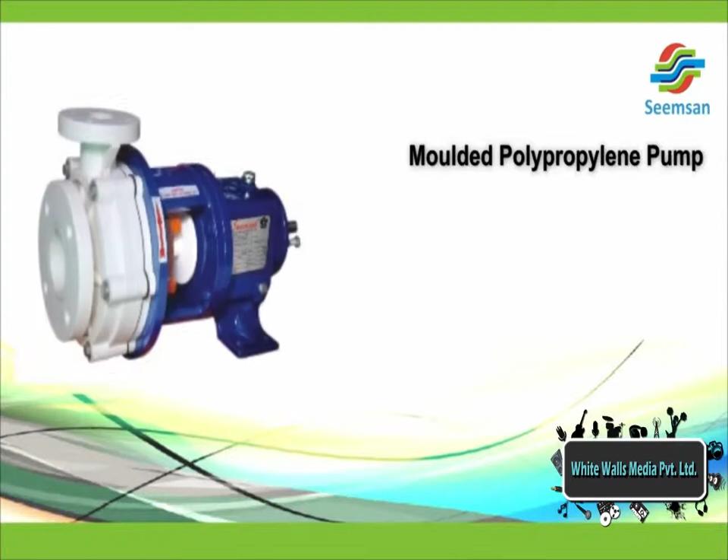Seemsan today offers a product range of three basic categories of pumps: molded polypropylene pumps with a capacity of 0 to 400 cubic meter per hour, a total head of 0 to 63 meters, power of 1 to 60 horsepower and temperature up to 60 degrees Celsius.

Injection molded PVDF pumps with a capacity of 0 to 125 cubic meter per hour, total head of 0 to 50 meters, power of 2 to 30 horsepower and a temperature up to 120 degrees Celsius.

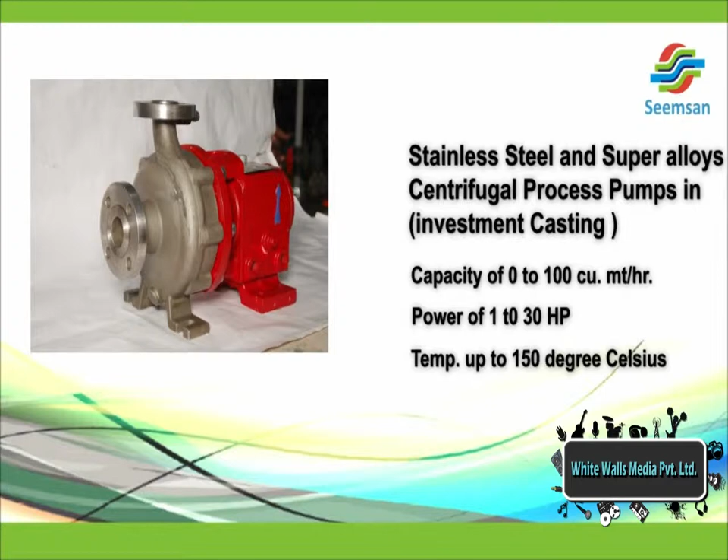Stainless steel and super alloy centrifugal process pumps in investment casting with a capacity of 0 to 100 cubic meter per hour, total head of 0 to 100 meters, power of 1 to 30 horsepower and temperature up to 150 degrees Celsius. Molded polypropylene pumps.

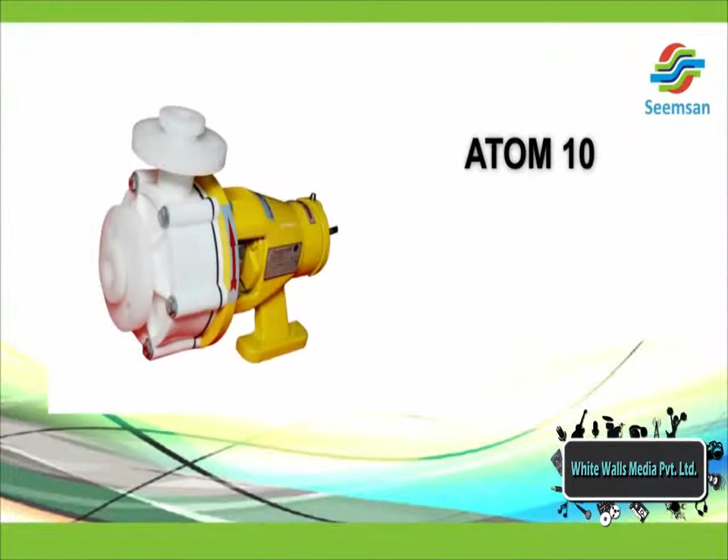This product line includes Atom series, which are low capacity and intermittent duty pumps and consists of 4 models. Atom 10 with a capacity of 0 to 9 cubic meter per hour, head of 3 to 12 meters and power of 1 horsepower. Atom 120 with a capacity of 0 to 15 cubic meter per hour, head of 4 to 14 meters and power of 2 horsepower. Atom 130 with a capacity of 0 to 18 cubic meter per hour, head of 12

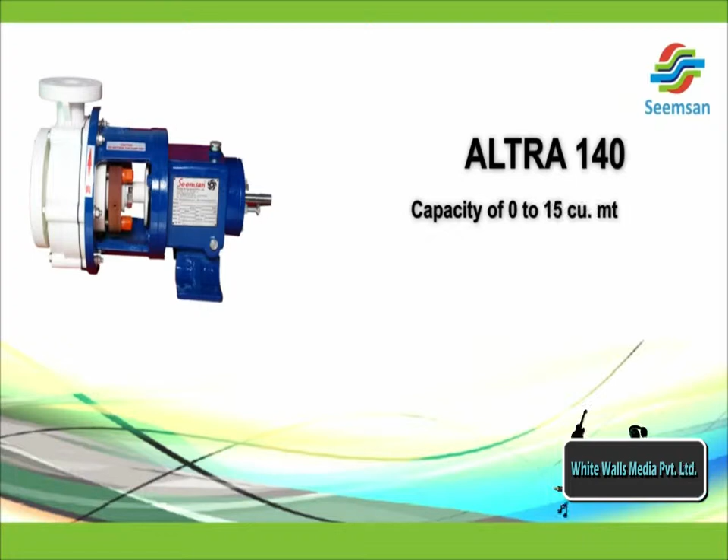to 25 meters and power of 3 horsepower. Atom 135 with a capacity of 0 to 20 cubic meter per hour, head of 12 to 27 meters and power of 3 horsepower. Altra series offers high speed and low speed series. The Altra High Series pumps have 5 models. Altra 140 with a capacity of 0 to 15 cubic meter per hour, head of 6 to 14 meters and power of 2 horsepower. Altra 150 with a capacity of 0 to 25 cubic meter per hour, head of 10

to 22 meters and power of 3 horsepower. Altra 160 with a capacity of 0 to 38 cubic meters per hour, head of 12 to 31 meters and power of 5 horsepower. Altra 170 with a capacity of 0 to 50 cubic meter per hour, head of 14 to 35 meters and power of 7.5 horsepower. Altra 180 with a capacity of 0 to 48 cubic meter per hour, head of 24 to 51 meters and power of 12.5 horsepower. The Altra Low Series pumps have 3 models.

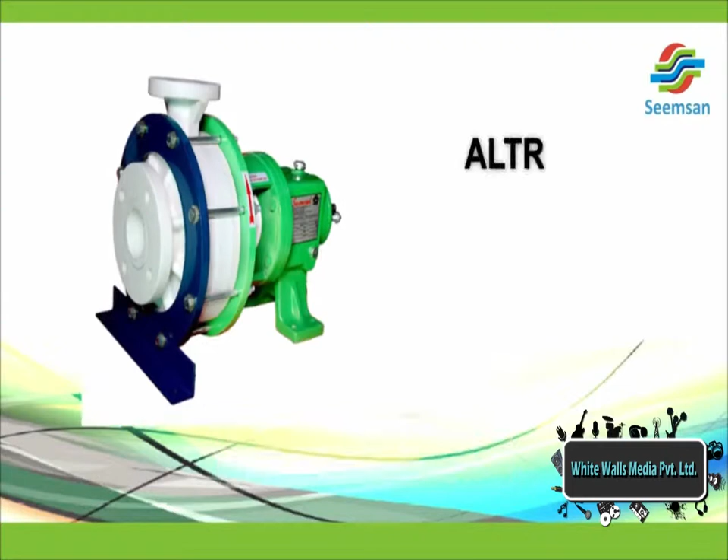ALTR 190 with a capacity of 0 to 24 cubic meters per hour, head of 7 to 12 meters and power of 2 horsepower. ALTR 200 with a capacity of 0 to 30 cubic meter per hour, head of 9 to 15 meters and power of 3 horsepower. ALTR 210 with a capacity of 0 to 44 cubic meter per hour, head of 8 to 16 meters and power of 5 horsepower.

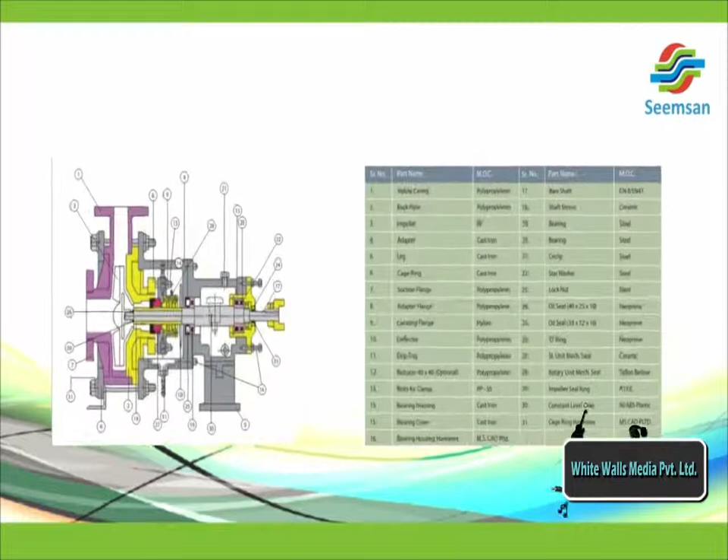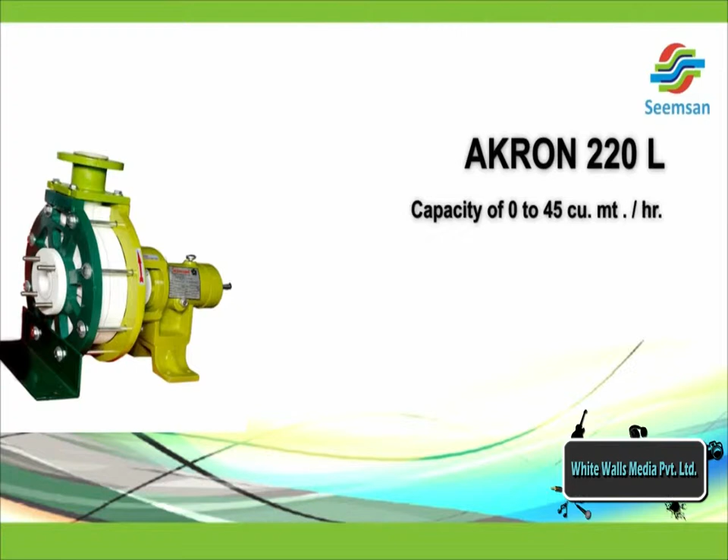Akron series, which are high capacity and high head pumps, consist of 5 models. Akron 220L with a capacity of 0 to 45 cubic meters per hour, head of 8 to 18 meters and power of 5 horsepower. Akron 220H with a capacity of 0 to 60 cubic meter per hour, head of 40 to 63 meters and power of 15 horsepower. Akron 230 with a capacity of 0 to 85 cubic meters per hour, head of 25 to 38 meters and power of 20 horsepower.

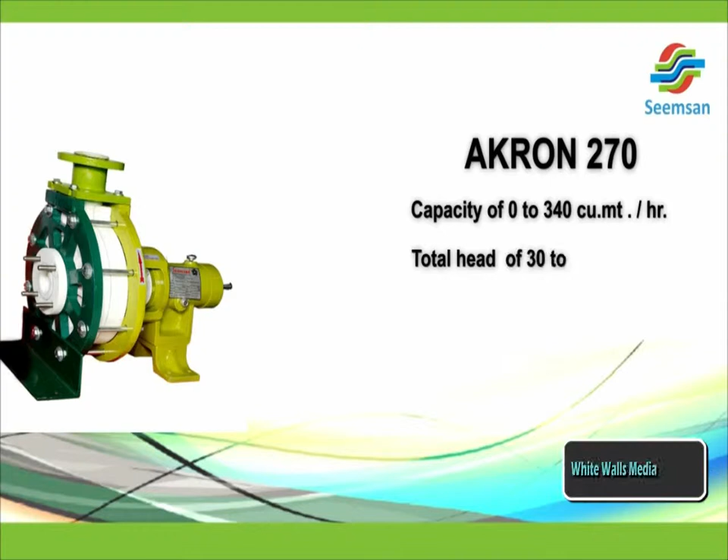Injection molded PVDF pumps offer a series of high and low speed pumps. The low speed PVDF pump has 11 KS series models.

KS20 with a capacity of 0 to 8 cubic meters per hour, head of 0 to 4 meters and power of 1 horsepower. KS25 with a capacity of 0 to 10 cubic meters per hour, head of 0 to 6 meters and power of 1.5 horsepower.

KS35 with a capacity of 0 to 28 cubic meters per hour, head of 0 to 23 meters and power of 5 horsepower.

KS40 with a capacity of 0 to 20 cubic meters per hour, head of 0 to 7 meters and power of 2 horsepower.

KS45 with a capacity of 0 to 28 cubic meters per hour, head of 0 to 13 meters and power of 3 horsepower. KS50 with a capacity of 0 to 35 cubic meters per hour, head of 0 to 8 meters and power of 5 horsepower.

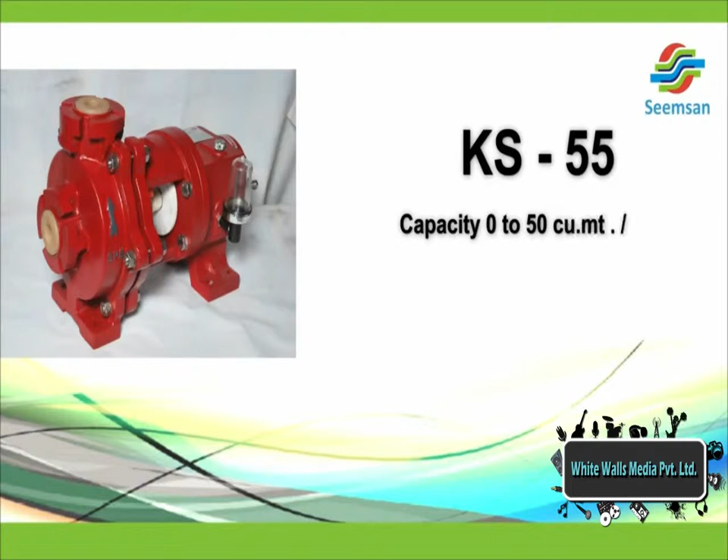KS55 with a capacity of 0 to 50 cubic meters per hour, head of 0 to 35 meters and power of 15 horsepower. KS60 with a capacity of 0 to 40 cubic meters per hour, head of 0 to 10 meters and power of 7.5 horsepower.

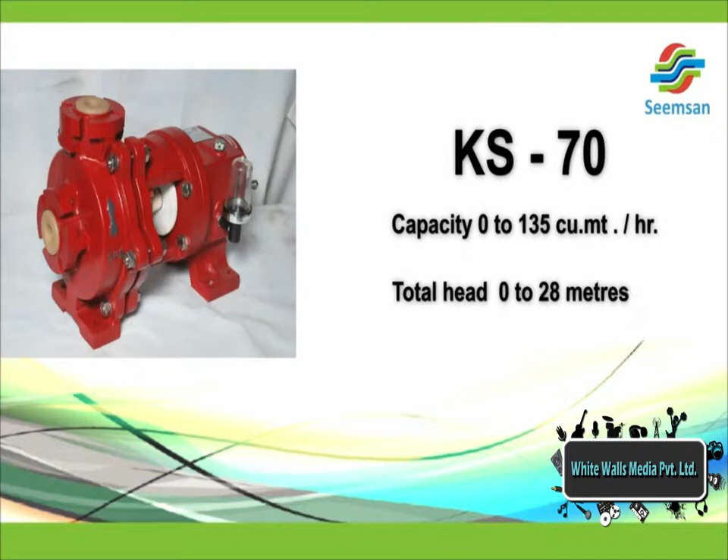KS70 with a capacity of 0 to 135 cubic meters per hour, head of 0 to 28 meters and power of 15 horsepower. KS80 with a capacity of 0 to 100 cubic meters per hour, head of 0 to 14 meters and power of 10 horsepower.

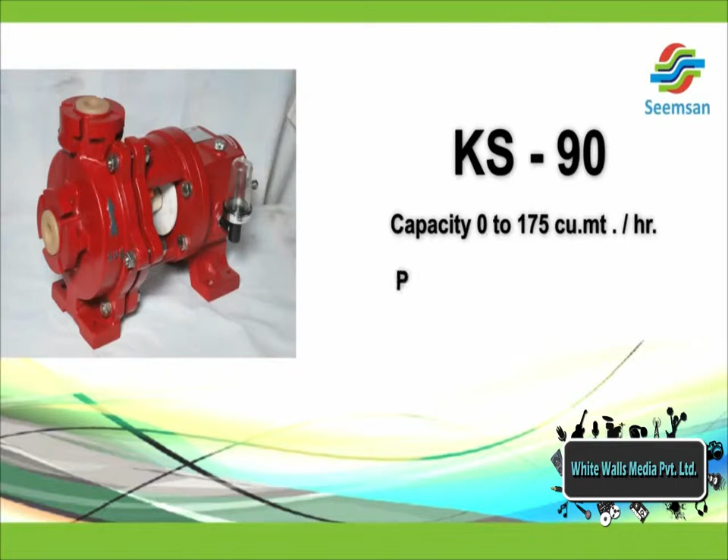KS90 with a capacity of 0 to 175 cubic meters per hour and power of 20 horsepower. The high-speed PVDF pump has 9 KS series models.

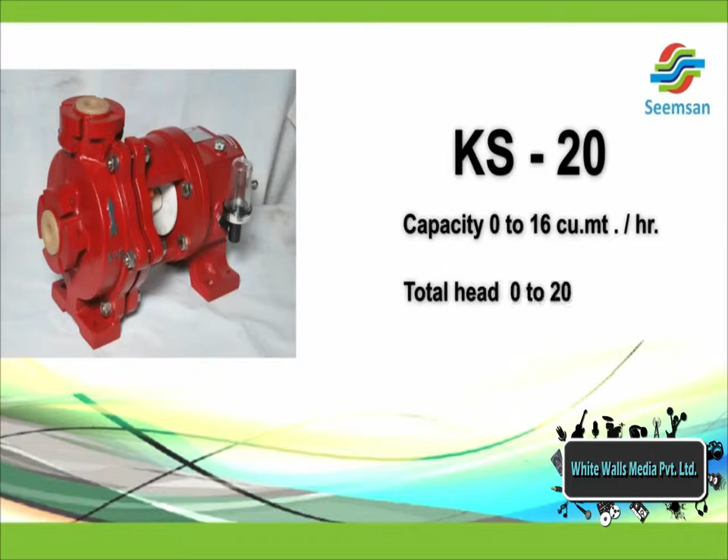KS20 with a capacity of 0 to 16 cubic meters per hour, head of 0 to 20 meters and power of 2 horsepower. KS25 with a capacity of 0 to 22 cubic meters per hour, head of 0 to 27 meters and power of 3 horsepower.

KS30 with a capacity of 0 to 30 cubic meters per hour, head of 0 to 60 meters and power of 10 horsepower.

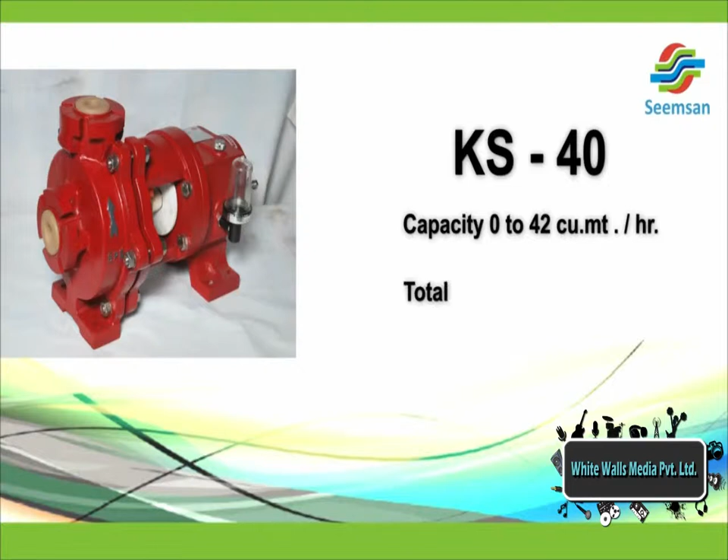KS40 with a capacity of 0 to 42 cubic meters per hour, head of 0 to 32 meters and power of 5 horsepower.

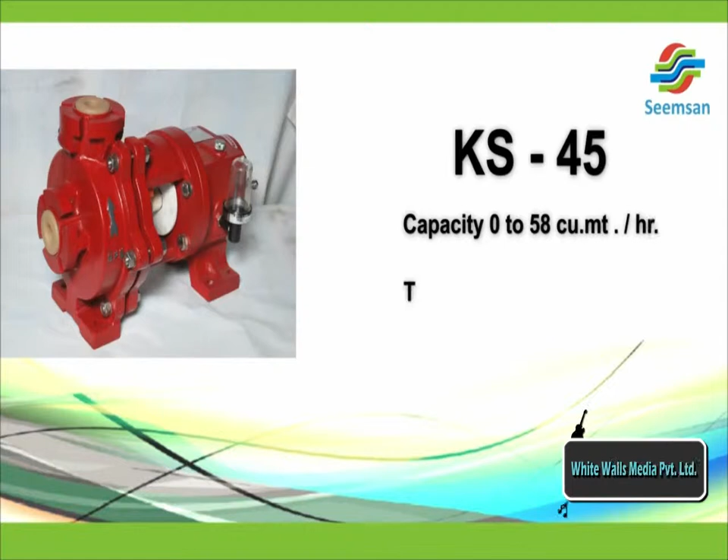KS45 with a capacity of 0 to 58 cubic meters per hour, head of 0 to 52 meters and power of 20 horsepower. KS50 with a capacity of 0 to 75 cubic meters per hour, head of 0 to 36 meters and power of 7.5 horsepower.

KS60 with a capacity of 0 to 75 cubic meters per hour, head of 0 to 50 meters and power of 30 horsepower. KS70 with a capacity of 0 to 90 cubic meters per hour, head of 0 to 90 meters and power of 40 horsepower.

KS80 with a capacity of 0 to 180 cubic meters per hour, head of 0 to 50 meters and power of 30 horsepower. Stainless steel and super alloy centrifugal process pumps in investment casting has a range of 3 pumps.

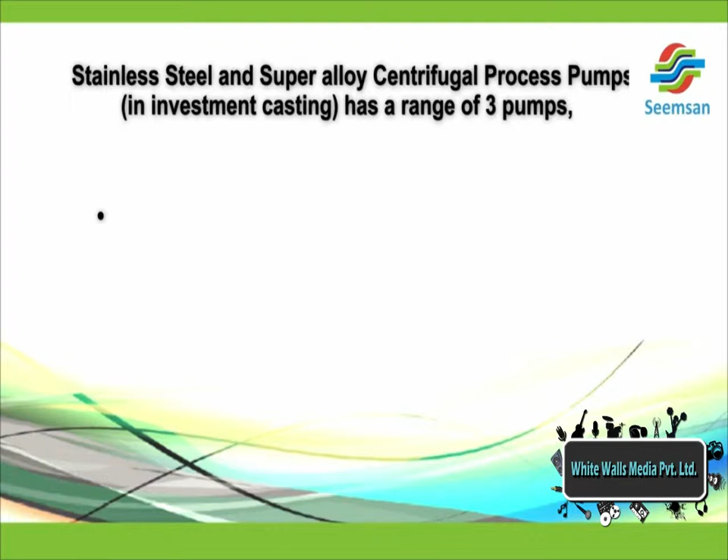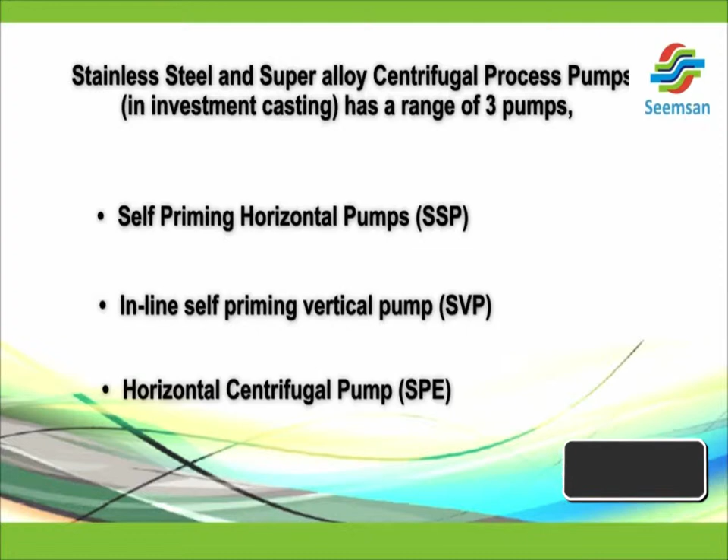Self-priming horizontal pumps SSP, inline self-priming vertical pumps SVP, and horizontal centrifugal pump SPE. The horizontal centrifugal pump has 9 models.

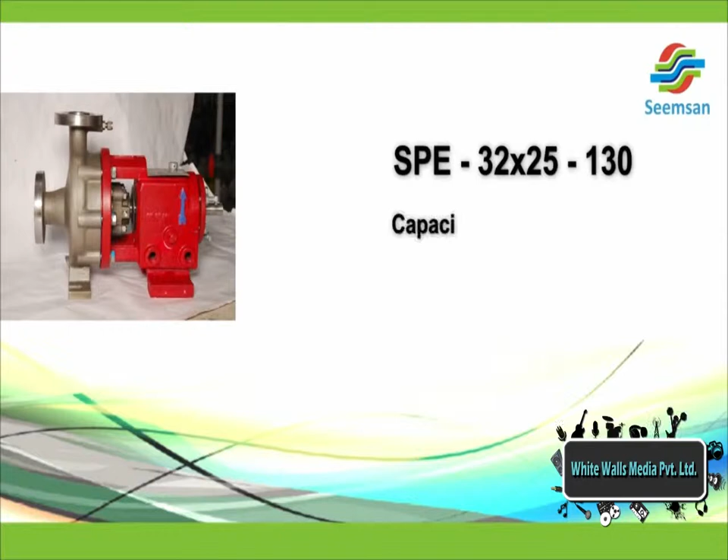SPE 32 x 25 130 with a capacity of 0 to 10 cubic meters per hour, head of 0 to 23 meters and power of 2 horsepower.

SPE 32 x 25 160 with a capacity of 0 to 20 cubic meters per hour, head of 0 to 35 meters and power of 3 horsepower.

SPE 32 x 25 180 with a capacity of 0 to 30 cubic meters per hour, head of 0 to 45 meters and power of 5 horsepower.

SPE 40 x 25 150 with a capacity of 0 to 30 cubic meters per hour, head of 0 to 35 meters and power of 3 horsepower.

SPE 40 x 25 200 with a capacity of 0 to 38 cubic meters per hour, head of 0 to 70 meters and power of 5 horsepower.

SPE 80 x 40 150 with a capacity of 0 to 40 cubic meters per hour, head of 0 to 32 meters and power of 7.5 horsepower.

SPE 80 x 40 200 with a capacity of 0 to 65 cubic meters per hour, head of 0 to 58 meters and power of 10 horsepower.

SPE 80 x 50 150 with a capacity of 0 to 60 cubic meters per hour, head of 0 to 34 meters and power of 10 horsepower.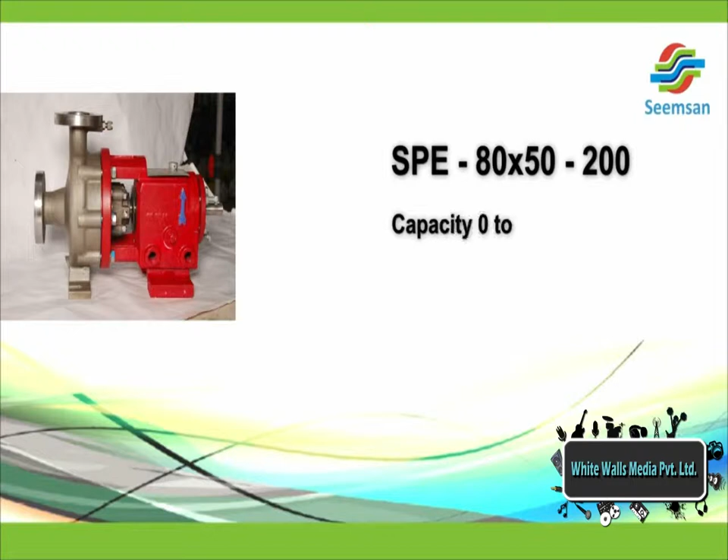SPE 80 x 50 200 with a capacity of 0 to 140 cubic meters per hour, head of 0 to 55 meters and power up to 20 horsepower.

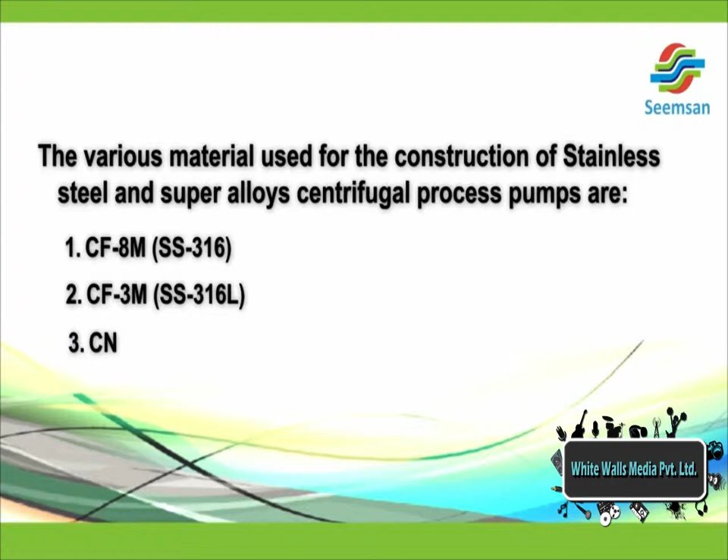The various materials used for the construction of stainless steel and super alloy centrifugal pumps are CF8M SS316, CF3M SS316L, CN7M Alloy 20, CD4MCU and Hastalloy B and C.

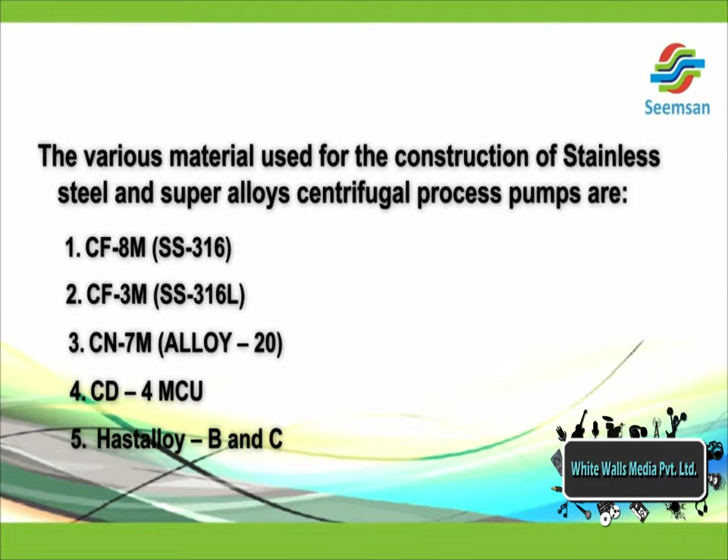To ensure best-in-class quality products and services, Seemsan has a complete set of in-house production facilities like mold making, injection molding, machining, welding, testing, etc. Also, at Seemsan, key emphasis is laid on record keeping for universal interchangeability of parts.

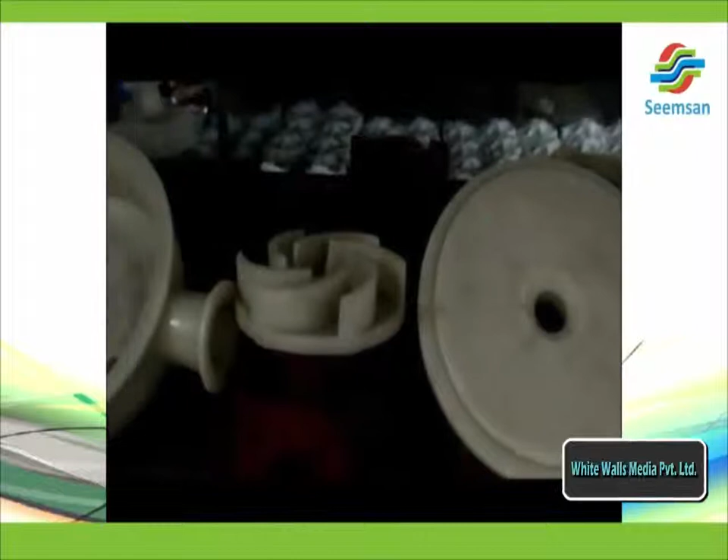Seemsan pumps find application in acid regeneration plants, pharmaceuticals and bulk drug plants, dyes and intermediate plants, steel pickling process plants, pesticide and insecticides plants, caustic chlorine plants, steel re-rolling mills, sugar mill and distillery, chemical processing industry, effluent treatment plants, pulp and paper industries, alkalis and caustic soda plants, power generation plants, solvent extraction plants, mineral industries, etc.